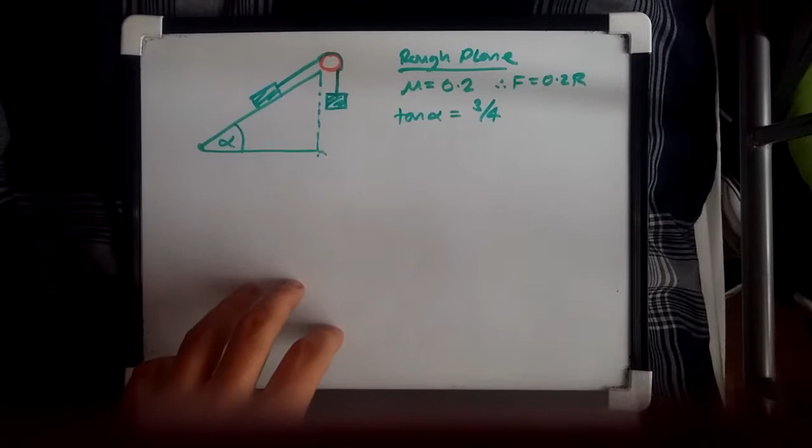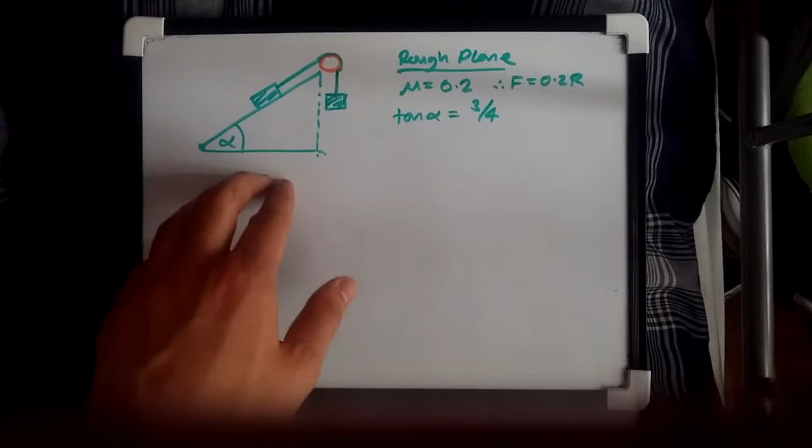Guys, welcome to another video on Mechanics M1, and in this one we'll be looking at dynamics of a particle moving in a straight line, but in particular an example I picked up from the Pearson Mechanics M1 book, example 16 on page 63. Here we're dealing with a typical rough plane that's inclined, and I just want to break down every single possibility of these kind of questions.

Okay, so this is just going to be a walkthrough on how to really understand, because these are questions which involve everything you've learned up to this stage. So without further ado, let's go.

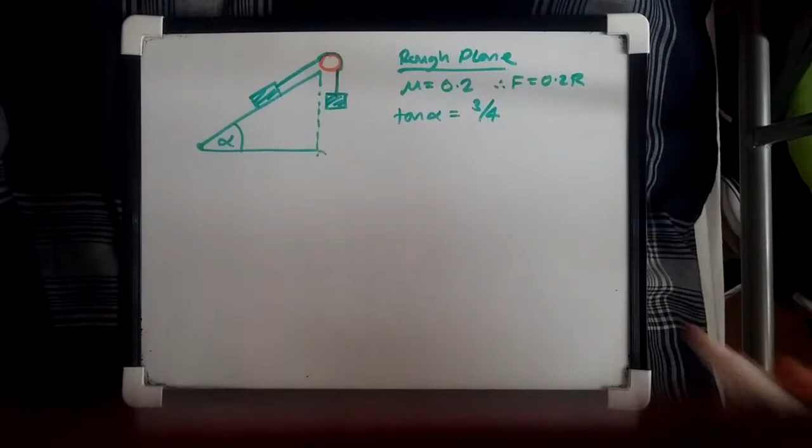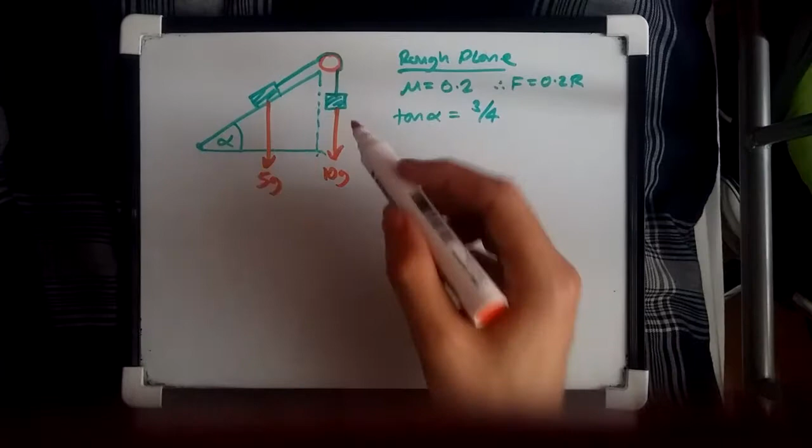So suppose we had two blocks, one that was 5 kg, which is 5g, and the other one which was 10 kg, which is now 10g. We also know that because the system is released from rest, the pulley, which is here, has some sort of light inextensible string, which implies that the tension should always be away from the particle, so it's going towards the pulley. So this is just a common fact.

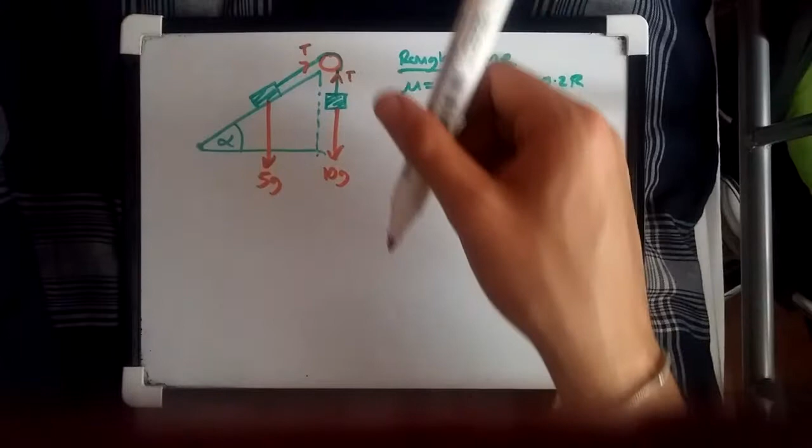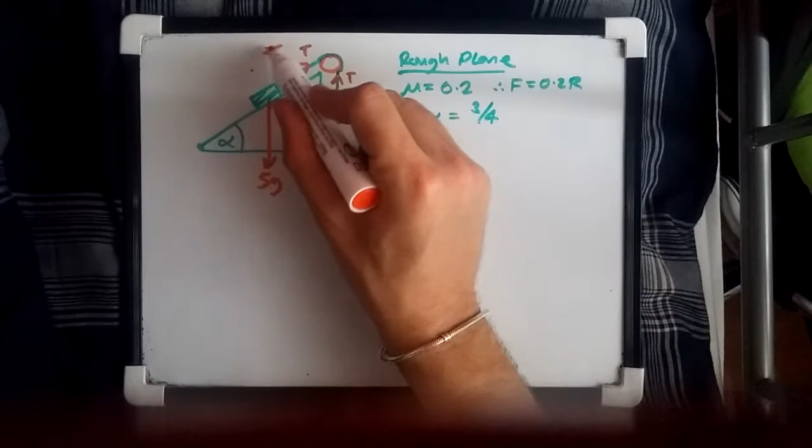We also know that due to acceleration, the system will move up the plane. Why? Because this is heavier. This is twice the weight of this one, so it's most likely that as this one goes down, this will climb up. So as it goes down, we can give this an acceleration of, say, a, and of course this is also going upwards. Give this an acceleration of a.

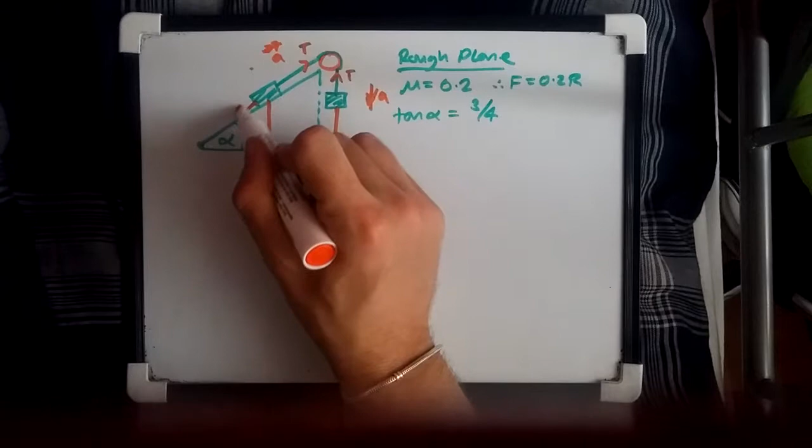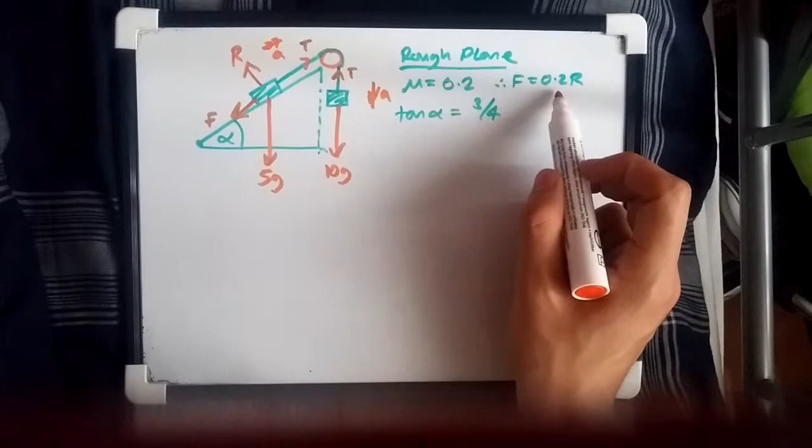Now, considering the plane itself, if this is moving on a rough plane, we know that there's friction, so we can give this friction of F. And the reaction is always perpendicular to the plane, which is R. Now, a key thing to note is that the coefficient of friction here is given to be 0.2. We also know that the maximum friction at limiting equilibrium, F would equal mu times R, which is 0.2R. And we also know that the angle is represented as tan alpha equals 3/4.

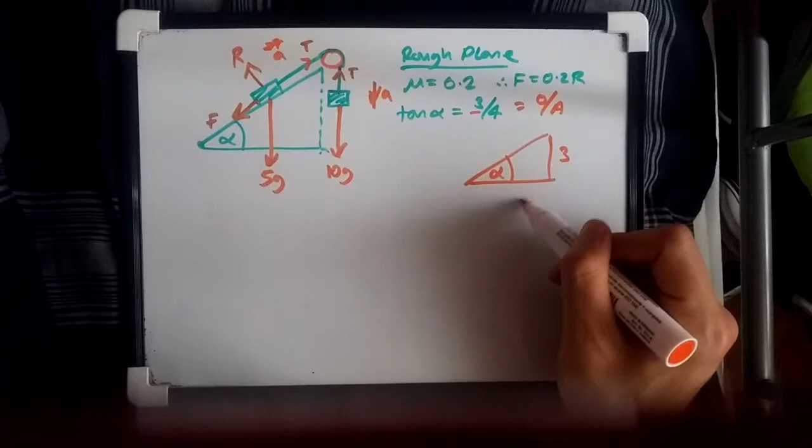Now, the easy way to do this without actually solving alpha is to consider a triangle, okay, with alpha here. Using trigonometry, we know this implies opposite over adjacent. So we know opposite here is 3 and the adjacent here is 4. Using Pythagoras theorem, 3 squared plus 4 squared is altogether 25. Square root 25 will give us 5. So to find the other values of trig, for example, cos alpha, without actually plugging in alpha, I would use this triangle because it gives you exact values, which is what the examiner wants.

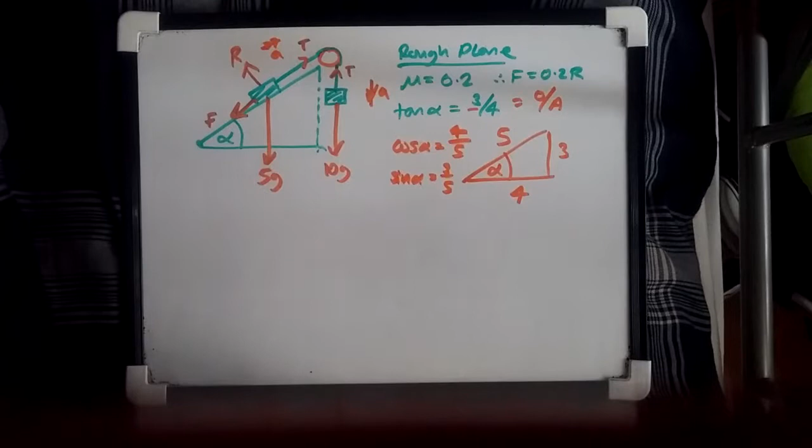Cos alpha is simply adjacent over hypotenuse. So the adjacent here is 4 over hypotenuse 5. So 4 over 5. Same thing for sine alpha. Sine alpha is opposite over hypotenuse. So opposite is 3 and the hypotenuse is 5. Okay, dead easy. So the preliminaries are done. Now let us resolve the system.

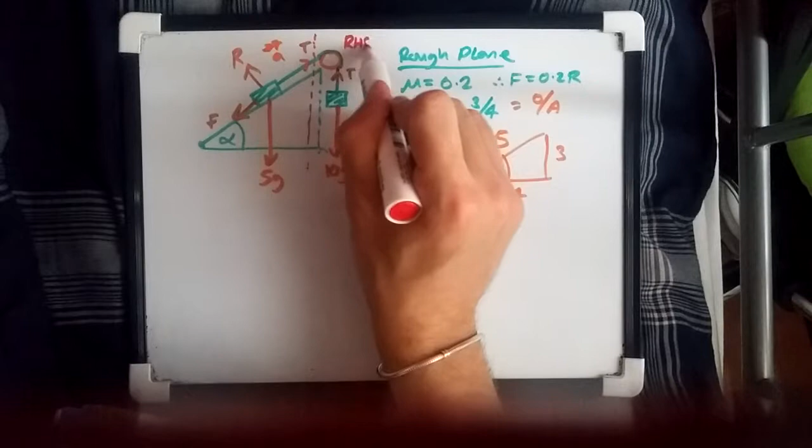So the first thing you want to do is to divide this system into two parts. Firstly, that involves two different particles. Okay, we've got one here, one here. Let's work with the right side here. So we're going to call this the right hand side. This one is the left hand side. Okay, so from the right hand side, what do we have? Let's resolve upwards.

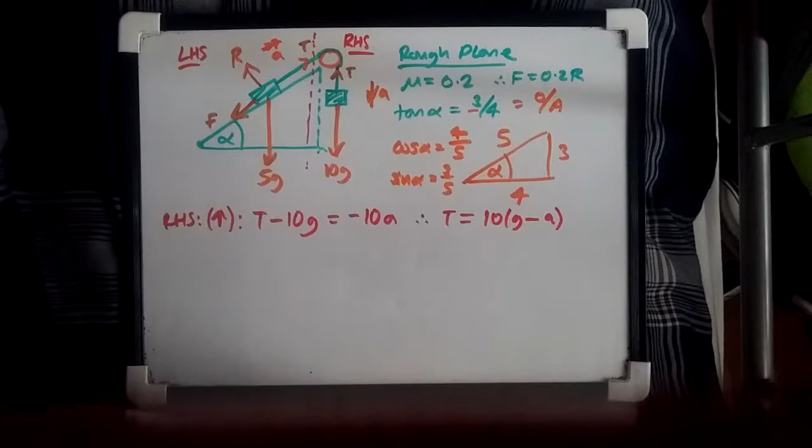So resolving upwards, we have T minus 10g equals, and because acceleration is going down, it'll be negative. Using ma, mass is 10, it'll be negative 10a. So then this can be rewritten, adding 10g across. We can have tension equals, factorizing 10, 10(g minus a). Okay, I think this is quite clear. You get 10g take away 10a, factorizing 10, you get g minus a. Now that's literally all we can do here.

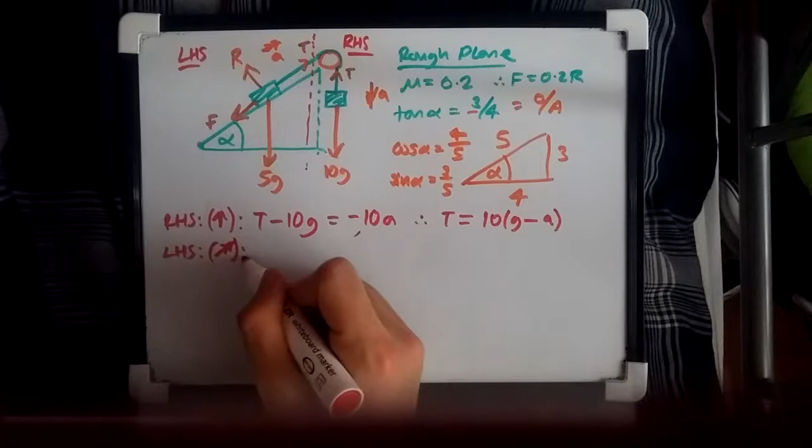So now we move to the left hand side. Here I recommend you work towards the direction of the acceleration, which is this way. So working towards the direction of acceleration, we're going to consider T as the main positive. So it'll be T, and then we look back, we've got minus F. We also need to consider that this angle is bent. So remember, this is now the axis, yeah? So from here to here, we know that the angle is alpha.

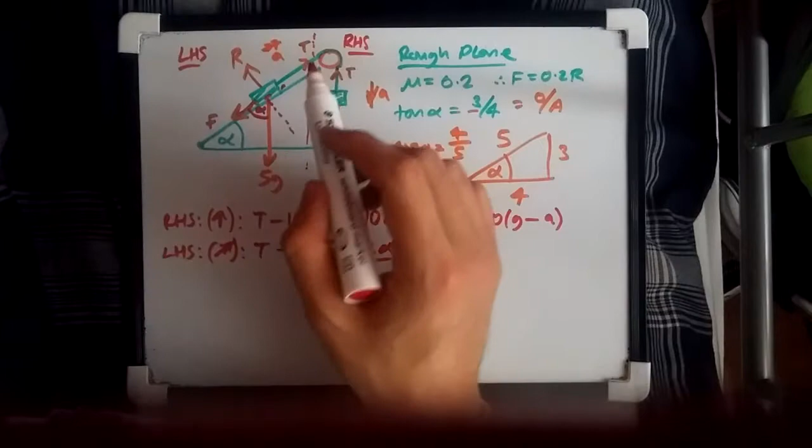So we're going to have minus 5g cos alpha, which we know the value of cos alpha is here. And all of this, I think that's all the forces, should equal, and because we're going in the direction of acceleration, it's going to be equal to 5a, mass times acceleration. So quite straightforward.

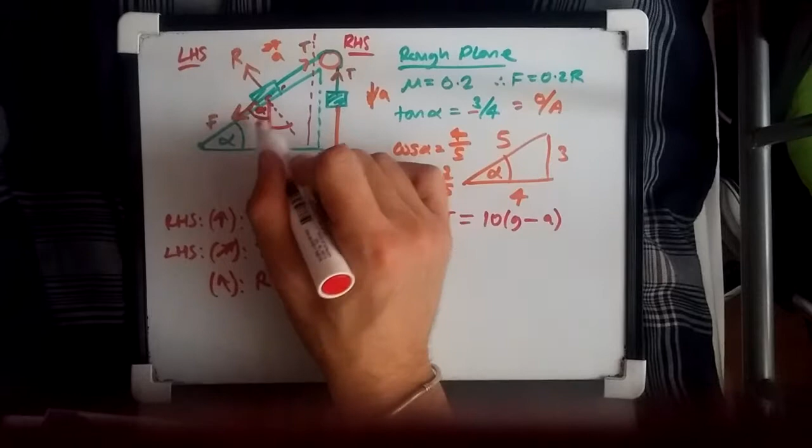Again, knowing, and then now let's do the other one. So we're resolving towards the perpendicular of the plane, which is towards R, we're going to have R. And because T and F are perpendicular to this, we don't count them. We count this one, which is the other angle. Okay, so this one should be 90 minus alpha, my bad. So this is 90 minus alpha. So this is going to be, hold up,

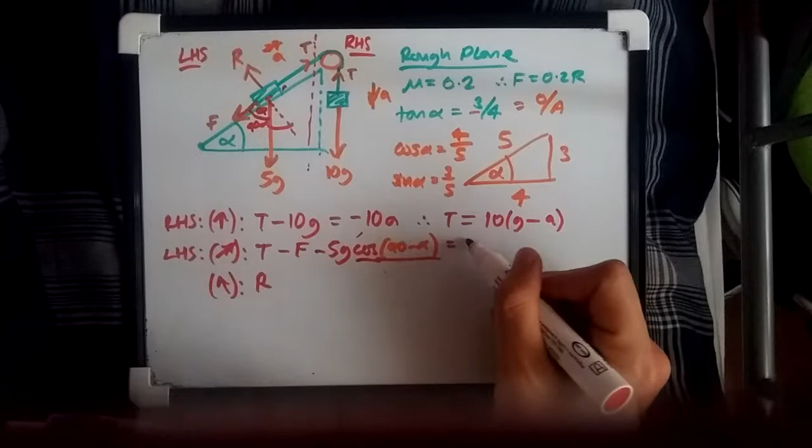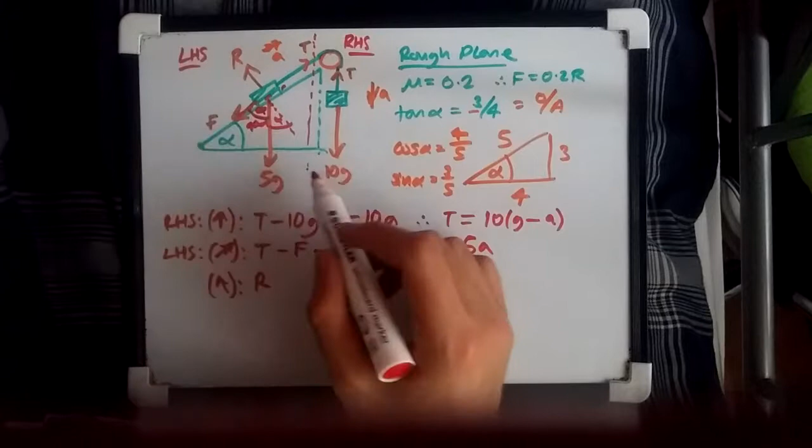Okay, so just quickly correcting this. 90 minus alpha equals 5a. Okay, now here, going back to what I said, so this one should be alpha. Yep, makes perfect sense. This is always equal to that. So we're going to have R minus 5g cos alpha. And this one, of course, equals 0.

Quick thing to note, cos 90 minus alpha is actually identical to sine alpha. And this, in turn, is equal to 3/5. Okay, so all of this equals 3/5. So let's find the value of R. So this means that R equals 5g cos alpha, which we know is 5g times 4/5. Keeping the g's in terms, we should have 4g.

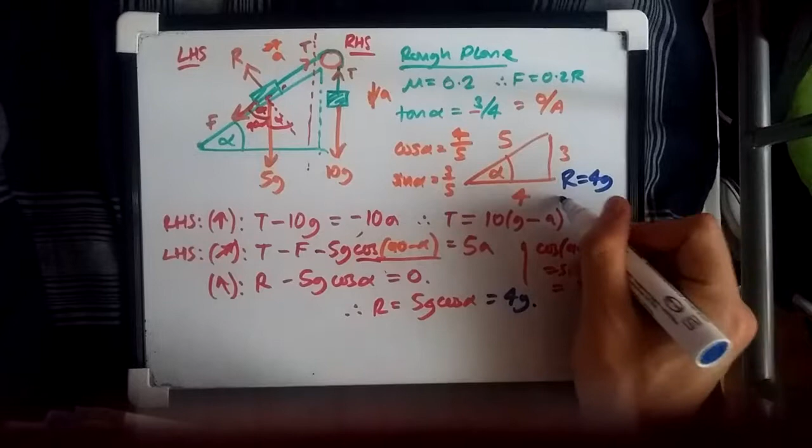Okay, so let's assume R is 4g now. I'm going to just put this up here. R equals 4g. That means, what's F going to be? F is going to be 0.2 times R. So F equals 0.2 times 4g and should give us 4/5 g. Okay, good. So let me rub out this last line of equation because we don't actually need it.

Now the key idea is that we need to substitute everything we have into the big equation to eliminate all these terms like F and T and keep in terms of a or g. Because g is a value, we just want everything in a single term. So replacing T here with 10g minus a, we're going to have 10g minus a, minus, replacing F with 4/5 g, minus 5g cos 90 minus alpha. We clarified this is sine alpha. So we're going to have 5 times 3/5, which is 3g, equals 5a.

And that's it. Now just a case of expanding and simplifying. Expanding this one, you're going to get 10g minus 10a minus 4/5 g minus 3g equals 5a. Collecting terms, adding 10a across, we're going to get 15a. Summing up the g's, 10g take away 4/5 g take away 3g should give us 6.2g. Now all you do is divide 15 across, so 6.2g over 15 should give us an acceleration of

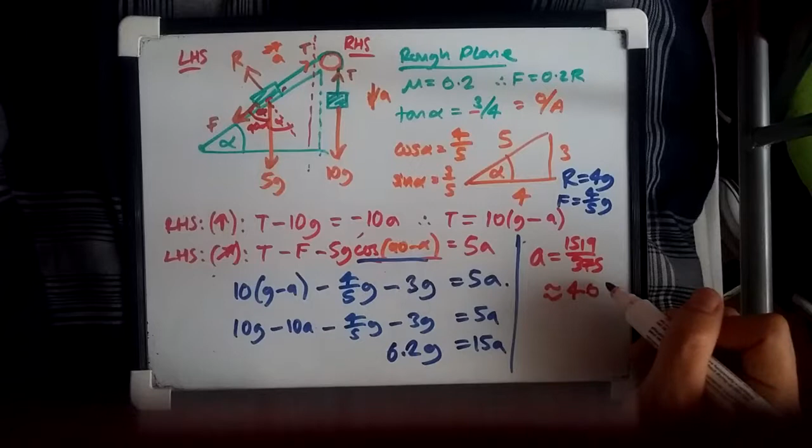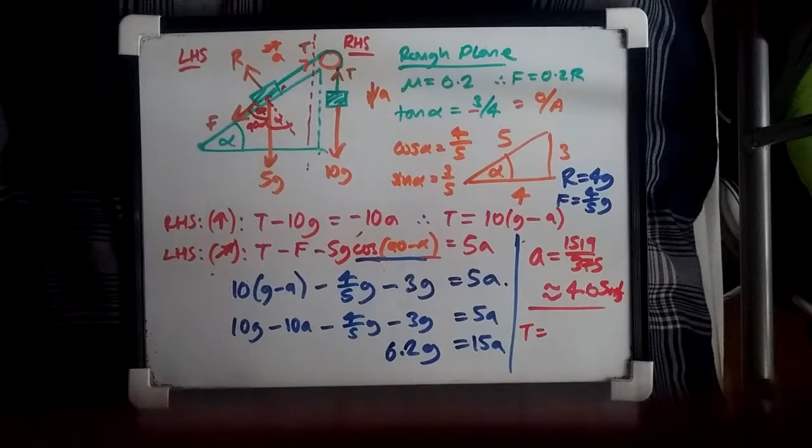a equals, well, there's two ways you can write it. You can write the exact form, 1519 over this, which I bet you won't. Or you can just say 4.05 meters per second squared. And of course, if you want to calculate tension, you pop this value here. So T would equal 10 times g minus a. So that should give us a tension value of 57.5 newtons, rounded.

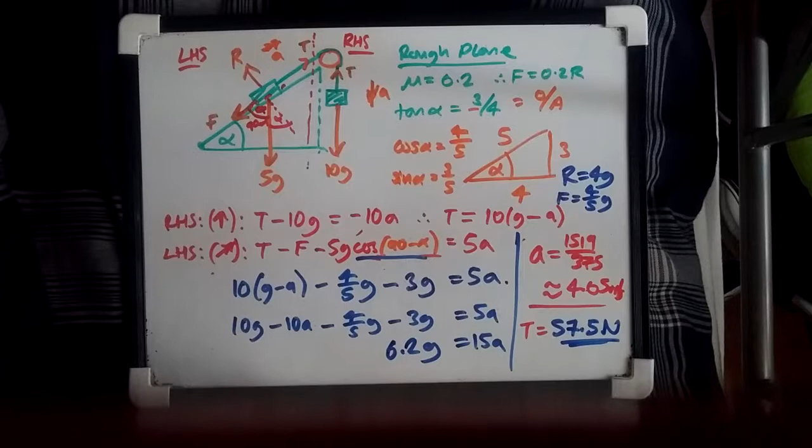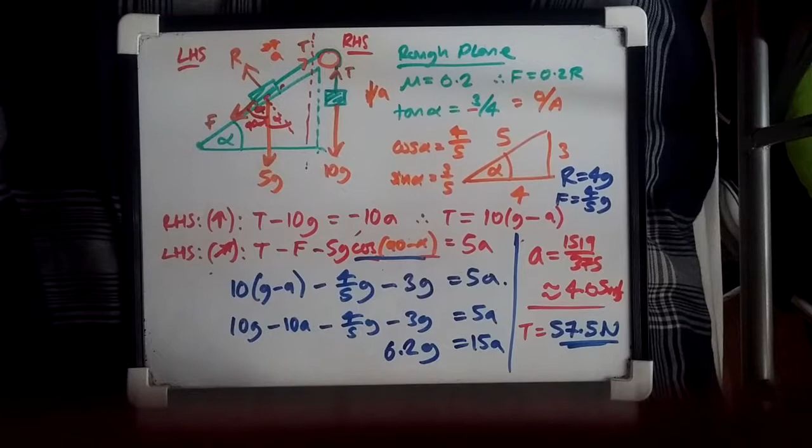So the main idea is to always consider the steps and always work out the bigger picture. My advice is always simplify as much as you can. Look at the small equation, simplify it as much as possible, then substitute all your terms like T into here, F back in here, and solve in terms of a, and you got it. A few steps is literally baby steps, and you gotta be very careful. Your algebra's gotta be spot on. But yeah, I think you got this.